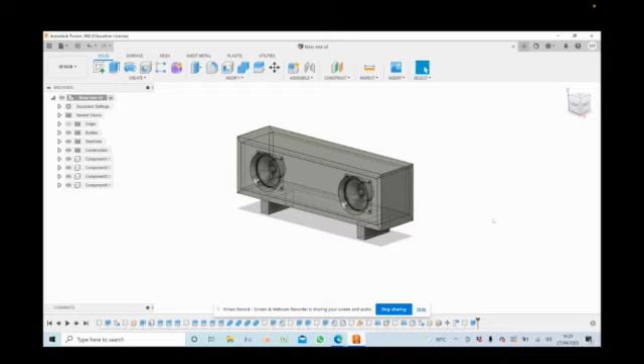Today I'll be showing you how to create a technical drawing using Fusion 360. The model on the screen is of quite a simple Bluetooth speaker, and this is what we're going to be referencing today. So to begin, what I want to do is go over to the left-hand side of the screen where we see the Design tab. We're going to click on that.

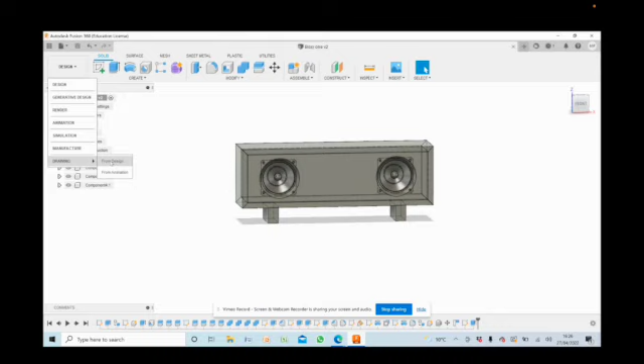And this is where we can take our three-dimensional model and turn it into a 2D orthographic drawing. So we're going to scroll down to Drawing, and it will give us two options when we highlight Drawing. It'll say From Design or From Animation. We want to use From Design. Once we click that, the Create Drawing box will pop up, and it gives us a few options.

We want to create a thing called a GA, or a General Arrangement Drawing today, which is, in essence, a 2D instruction manual of how to build an entire product, or how an entire product goes together. So we want full assembly to be clicked in this drop down here. Drawing, Create New, that's fairly standard, should always be the same. Template from scratch, that's absolutely fine.

ISO standard, perfect. Units, make sure they're in millimeters. If you are running an American machine or similar, they might appear in inches, but we want to use millimeters in the UK. Sheet size A3 is perfect, really good for printing out and putting into your portfolios. So I'm happy with that, so I'm going to go ahead and click OK.

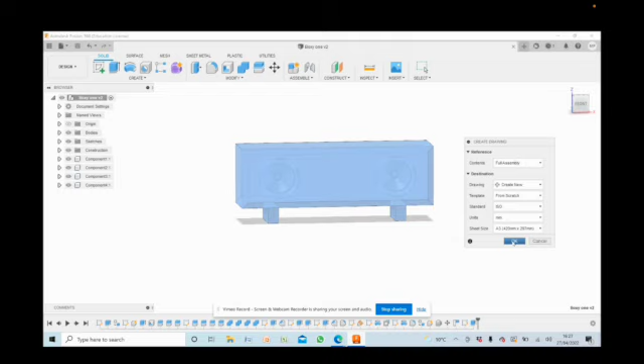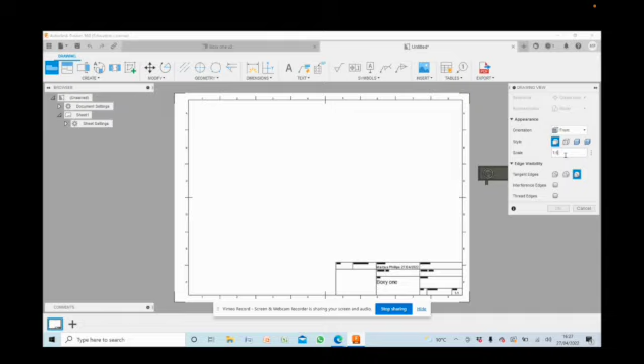Once I've clicked OK, a new tab opens. This is where we can start to draw in 2 dimensions using the original 3-dimensional model as a reference. So I've got the model kind of floating here with my cursor. That will remain until I click down onto the paper. But I want this to be slightly larger, so I'm going to change the scale from 1 to 5 to 1 to 3. This can always be changed at a later date.

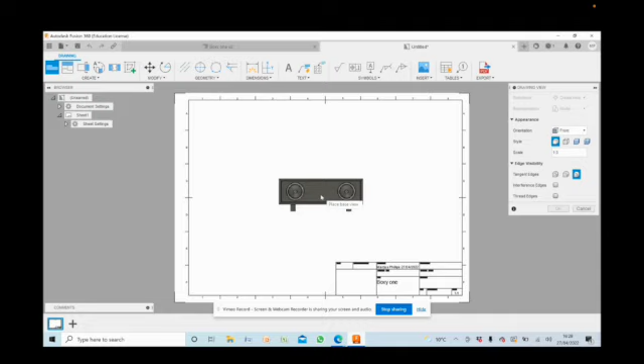I just like to see it quite large on the page as we begin. If I'm finding that the page is getting a bit too busy or confusing, then I will always reduce the size of the drawing. So I'm happy with that at 1 to 3. So now I'm going to click down somewhere in the middle of the page. Everything can be edited after, so it doesn't matter too much where you put your first model.

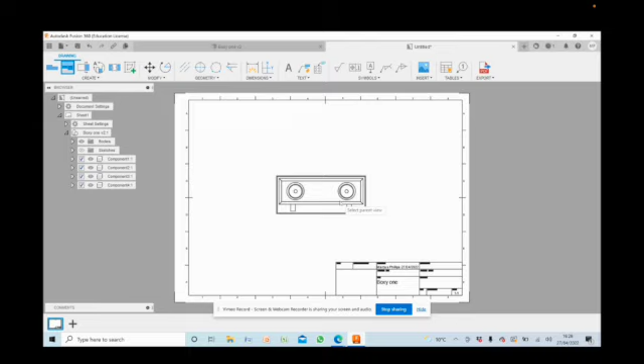So once that's been dropped there, we're going to go back up to the top left and click on Projected View. Projected View is a great tool. What it does is allow you to pull out different views of the 3-dimensional model, similarly to what we do when working with our 2D orthographic drawings. We look from a left view, a right view, bird's eye view, and a worm's eye view. We can do the same using the Projected View tool.

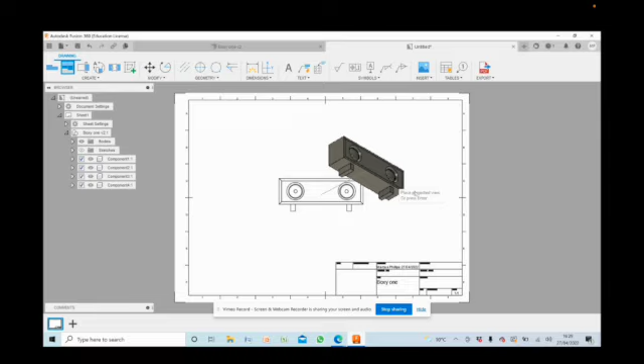So once it's been selected, you select the front-on view, and you will see, as I move my cursor around, that the view will change depending on where I move to on the page. So here, we'd be looking down on the model. Up here, we'd be looking up at the model. We'd be looking at the left-hand side of the model here, and we're looking at the right-hand side of the model there. Because the left and right-hand views of this model are fairly similar, I'm just going to select one, and that will describe how the product looks from both sides.

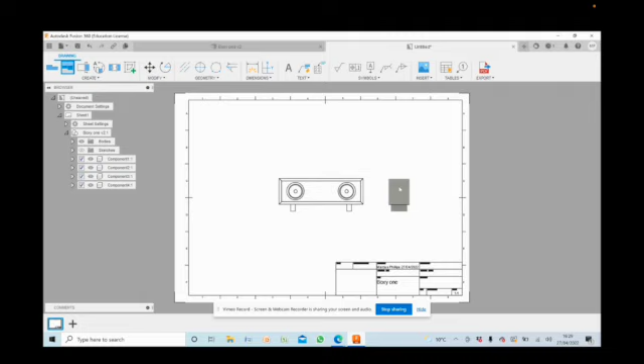So I'll probably go for a left view here, but I'll definitely put in a worm's eye view, and I'll also put in a bird's eye view there. And one thing that's really great is just to put kind of 45-degree side angle in so we can fully describe the product. We'll just stick that over there for the time being.

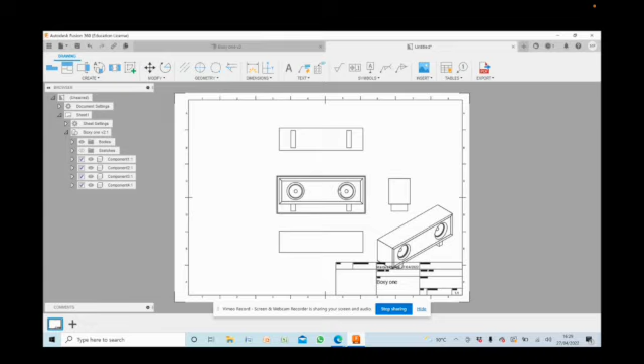Now, in order to move these around the page, you select and drag, and then release once you're happy with where they are, like so. And they will all move in accordance with each other, so they will always stay perfectly in line. Excellent, same over here.

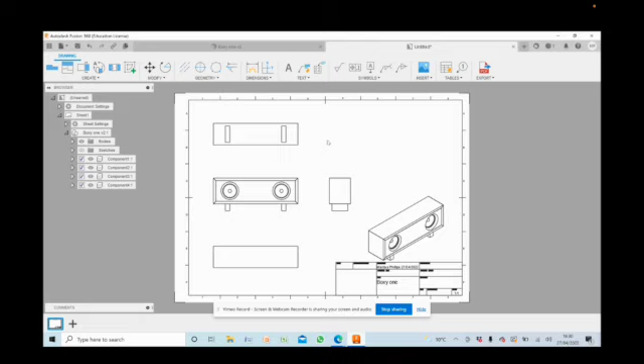There we go. Right, what we want to do now is pull off some dimensions from this product. So what I'm going to do is introduce, in my opinion, the most useful tool in this 2D drawing package. Now that is the dimensioning tool here. You want to select this tool, and what this tool does is it snaps to edges, points, circles or holes in the three-dimensional model, grabs onto them, and it's able to measure between specific lines that you tell it to measure between.

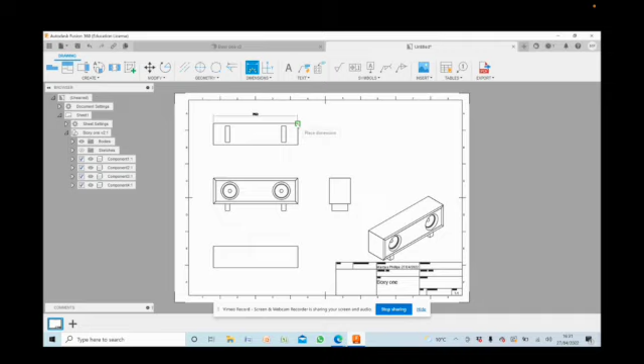So an example of this would be, if I click on the tool there, and I select this corner here, and I select this corner here, and click, you will see, if I zoom in, that has given me a reading of 360 millimeters. Now that's just an example, so I'm going to delete that, and I'm going to show you how to use

this tool effectively. When we're creating 2D technical drawings, what we want to do is always go from one point of reference. And there's reason for this. This is so if you hand this technical package on to someone to manufacture the product, you don't want them to get confused. You want them to be able to go to one point of reference, and using that point of reference, be able to read every measurement that they require to build this model from there.

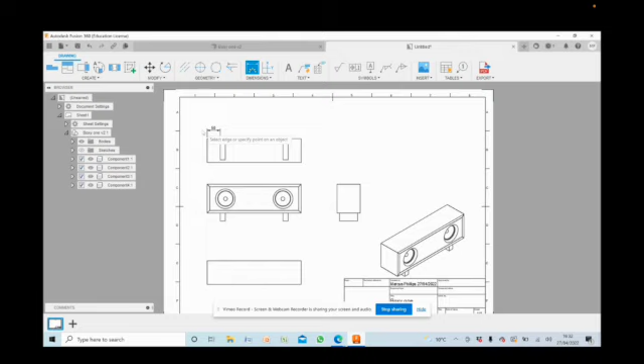So let's use this back line here. And what we're going to do is start by clicking on our datum point or our reference point, and we're going to measure out to the first point that you encounter as you move from left to right along the model. So that would be the underside of the foot of the product. So we're going to click there and drag up. Now that is 50 millimeters away. We can see there. So we know that from the left-hand side of the product to the left-hand side of the product's foot is 50 millimeters. So that's the first point of reference.

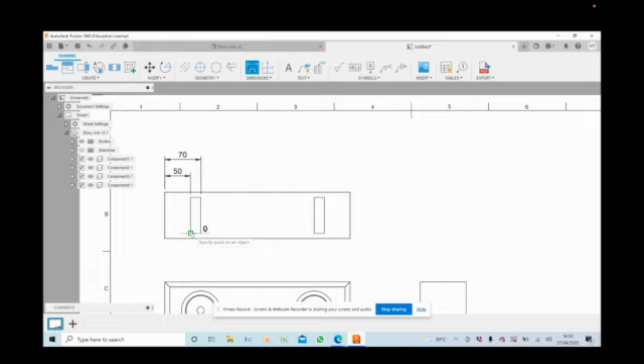We're then going to have another go using that same 0 point there, the datum point, and we're going to go to the right-hand side of the foot, click there, pull up, and click again. And now we know that from one side to the datum point is 50 millimeters, and then from the other side to the datum point is 70 millimeters. And what that tells us is that the width of this foot is 20 millimeters. Now I can check that by clicking like so, and indeed, yes, 20 millimeters.

So next, we go back to our reference point. Always go back to the reference point, and we go to the next point of interest, which would be the other foot. And we pull it out, and we click. And we do again for the other side. And we pull out, and we click. And those two are the same. That sounds about right, or looks about right.

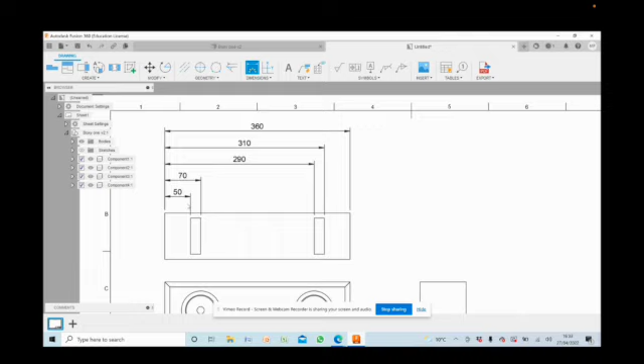Now I just want to know how far it is from the datum point right to the end of the product, which is the final point of reference, and that is 360 mil. So we know that this foot is 50 millimeters away from the left-hand edge. We know that this foot is 290 millimeters away from that datum edge, and we know that the entire product is 360 millimeters in length.

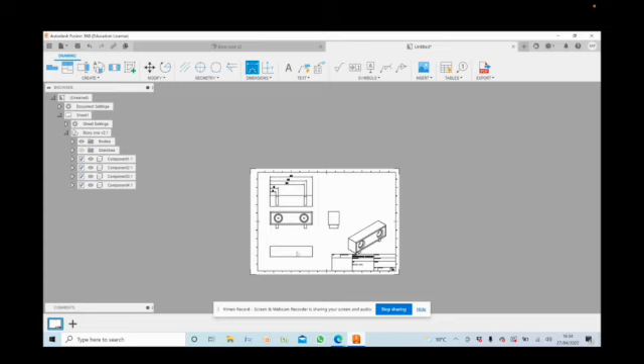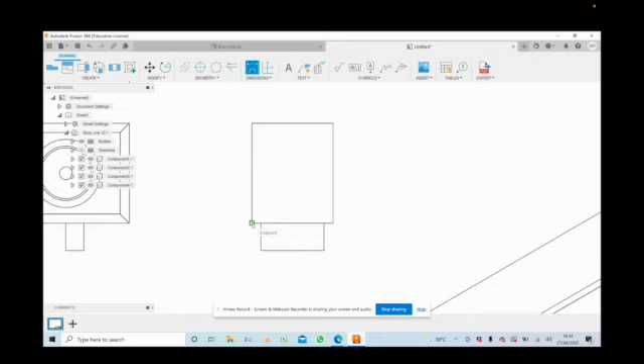So what we're going to do now is do the same thing, but side on. And what that will tell us is we know how far back this foot starts, if you look at it from the side, but we need to know the detail of how far in it goes. So we're going to do something similar by choosing this as the reference point here. And we're going to go out to the first point of interest, which is 10 millimeters.

Probably better to do it from there to there. So that shows 10 millimeters. So we know that from the front to the start of the foot is 10 mil.

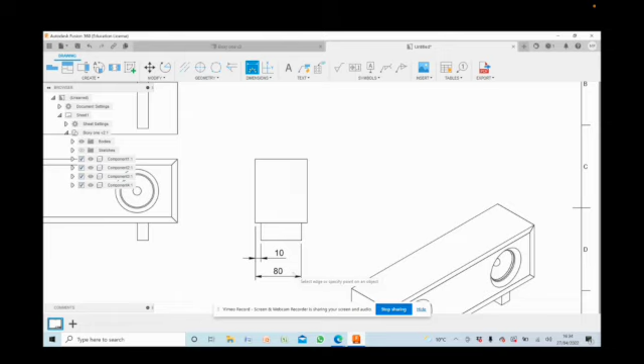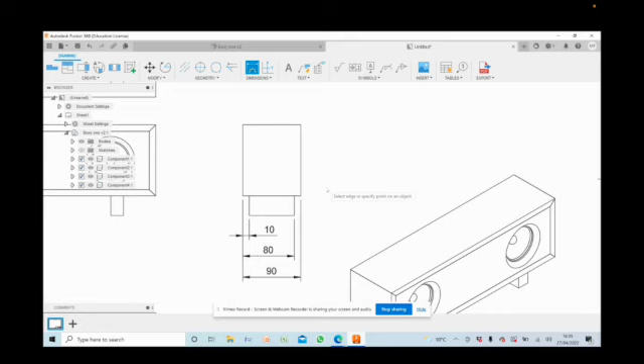And then to the next point of interest is over here. So already, just by taking two measurements from the front as we look at the product, we know that you need to go 10 millimeters in before the foot starts, and then another 70 millimeters, because 80 minus 10 is 70, to the back. And then from there, we can measure the width of the product, which on this occasion is 90 millimeters. So we're starting to build up a three-dimensional picture of the detail of this product through two-dimensional drawings, really understanding the front and side of the product.

Now, what else do we need to know about this product? We need to know things such as the holes where the speaker drivers are inserted into, where are they? And how do we know where to make those holes?

Well, same thing again, we choose a point of reference, usually on the left-hand side of the model. And what we need to work out is that center point. Where are we going to drill the holes? So we're going to click on that point of interest, and drag down. We know that from the left-hand side of the product to the center hole is 70 millimeters. And we're going to do the same for the other hole. We know now that is 290 millimeters.

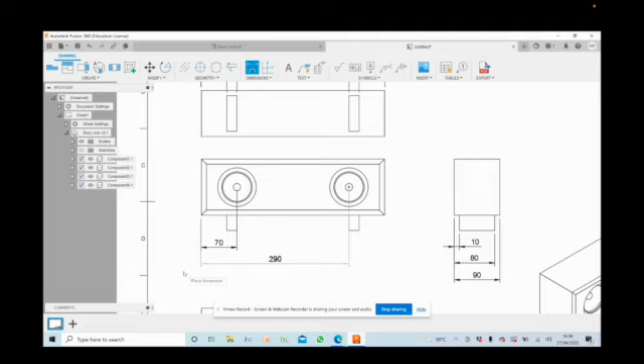Same thing again, we need to know how far up those holes are. So we're going to go from the same point of reference to that hole there, but to the side. So we can see that it's 55 millimeters from this 0 point here to the center point of that hole there. And they are identical, or mirrored rather.

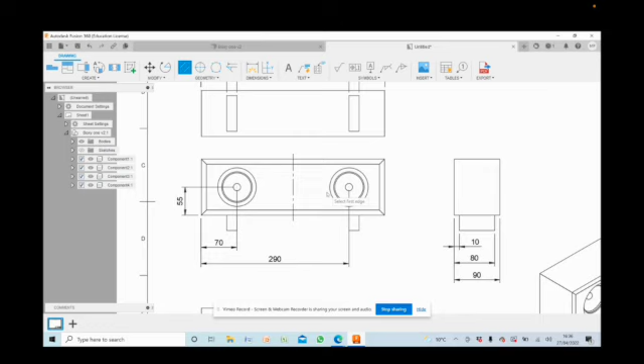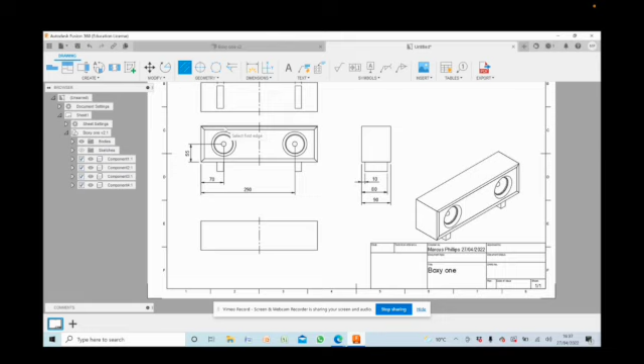So we want to show that by putting in something called a center line, and we select that edge and that edge. And that shows us that this side here is exactly the same as this side here. They're just mirrored. So that's a good habit to get into, using the center line tool up here, just to show where things are equal as you look at them. So actually all of these parts here are mirrors of each other, so we just want to put that center line in.

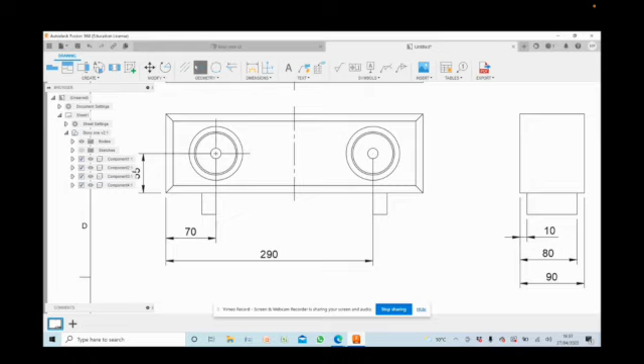Another good thing to do to make it clear for anyone manufacturing these products is show that there's a hole in the face here. We can do that by using center mark. What a center mark does is show that there's a hole there, but it also shows that it's a perfectly circular hole. We use this tool by clicking on it, clicking on center mark, and clicking on the outside of that incision, and that shows a kind of cross that goes through the middle, showing that it's perfectly circular, and that indicates where to drill.

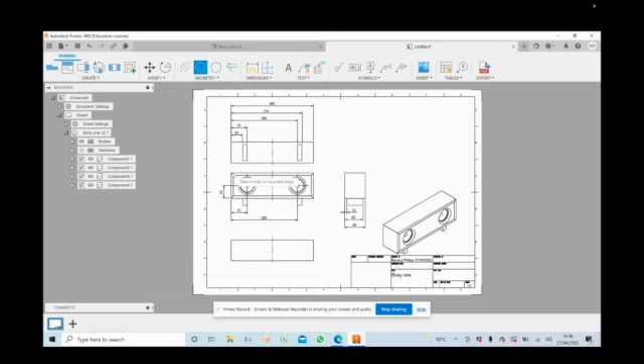So we've already got a lot of information down, but we could have a bit more. We could have more in the sense of the way that this product's assembled. It seems to me that it's made from pine or plywood, something like that, but we need to add more detail. How thick is that ply or pine wood, and how is it joined together?

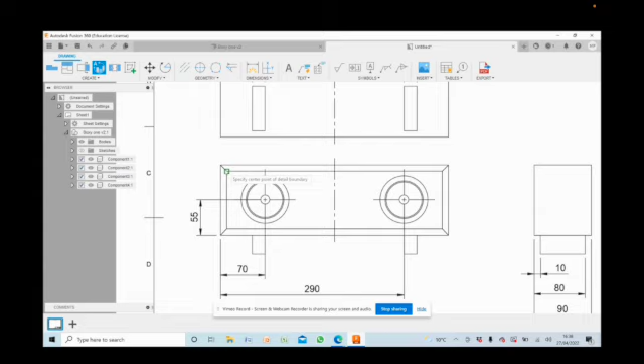So what I want to do is actually zoom in on this part here, which shows the joint, some mitre joint, and I want to show how this is assembled. So I'm going to go to Detail View up here on the left, click on that tool, and select any part of that corner. This is going to be called A. It's kind of like a magnifying glass almost. And I'm going to drop the other part of A there. Probably going to make it 1:1, kind of like a zoom in.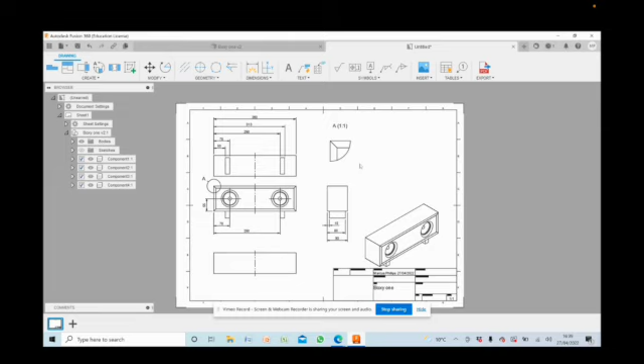So what we've done is circled it, like so. And then a larger image of A has popped up here. What we can do with this larger image is start to detail it. And what I mean by that is add a thickness. So we can say that is 10 millimeters there, and that is 10 millimeters there. And we can also add in an angle using dimensions as well.

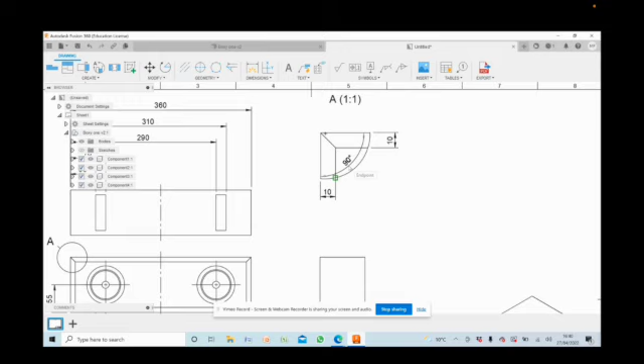That'd be angular dimension. Select that line and select that line, and that shows us that that is 90 degrees. It's probably not necessary on this drawing, as it's perfectly clear that that is 90 degrees. However, if you were using a different angle, something that wasn't quite as clear and obvious, you'd probably want to document that.

So that's a good way of showing a piece of detail, is using the detail view, drawing a bubble and pulling it out. Another thing we can do to add manufacture notes, always useful, is by simply writing in text here.

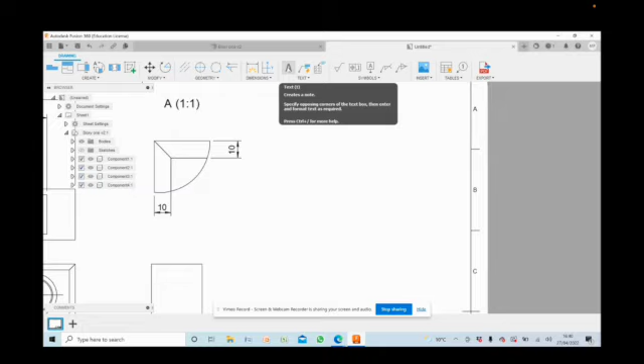So if you click on this icon that has the letter A, this is the text button, and it will allow you to write some manufacture notes. So you can just type in there, pop down.

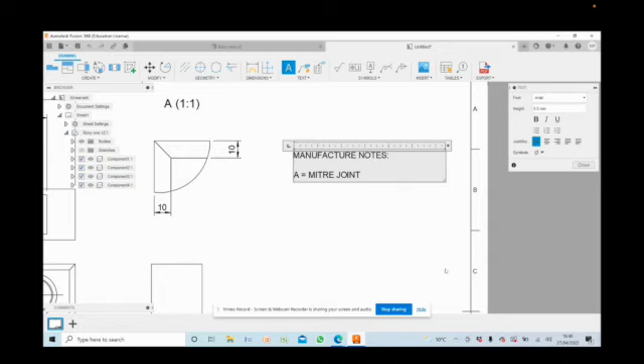I'm going to say A equals miter joint, 10 millimeters pine. I'm going to highlight that all the materials used are pine for the outer casing. Pine's a great material as it's relatively cheap, it's fast growing wood, and it's easy to work with.

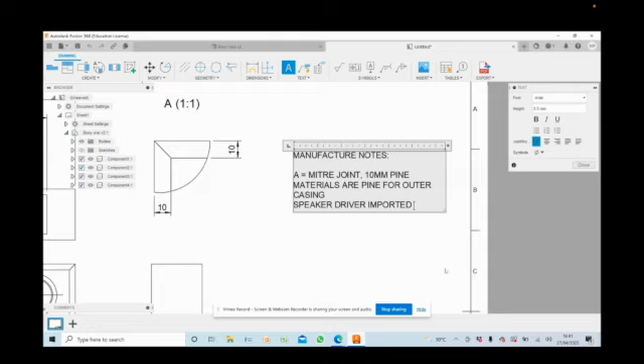I'm also going to highlight that the speaker drivers, so the actual cones or speaker cones, are imported parts. We don't have to worry about the manufacture of them too much, we can just buy them in. There we go. You just add those notes and they will be very helpful for anyone that is going to take this document and use it to manufacture our speaker.

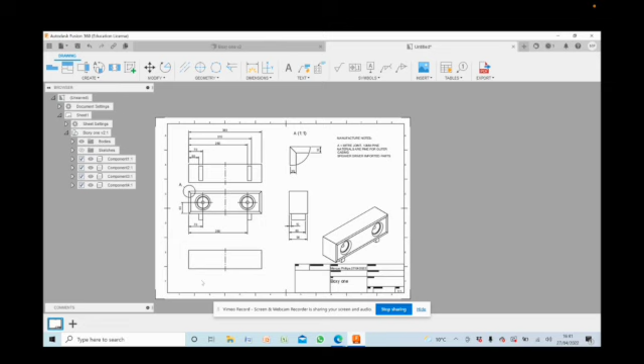Now, it's always good just to have a look over your drawing and observe anything that you've missed, any detail that you might have missed. Now, I've noticed that it's not clear how far this foot comes down, so it'd be great if I could just highlight that.

What I'm going to do is go back to the dimensions tool, click on dimensions, choose another point of reference. In this instance, I will opt for this right point here on the far extreme of the foot, measure up to the first point of interest, just 30 mil up, and then same for the top of the product. So that's 140.

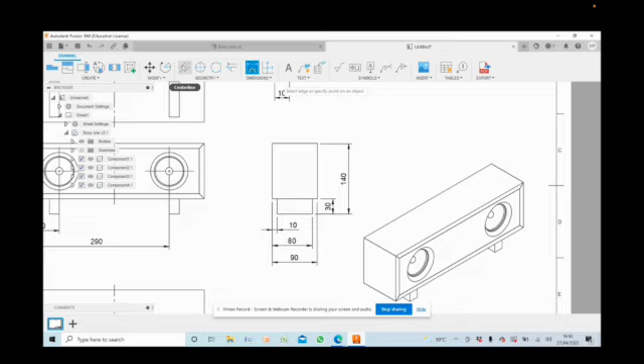I've also noticed that as you look, this side view is a mirror, so I'm going to put a center line in because they mirror each other. There shouldn't be any difference between the left-hand side and the right-hand side.

It's also got me to thinking, perhaps I should put in another note to explain how the foot is joined to the main body of the product. I would say, judging by the simplicity of the design and the fact that it's a product that is designed to be manufactured quite quickly and quite affordably, that it's most likely that this foot is joined using a butt joint and wood glue.

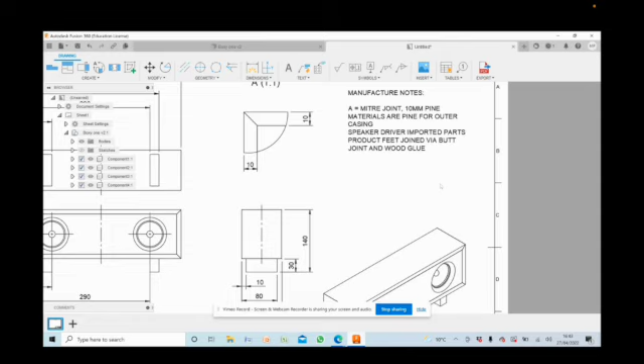So I'm going to put in: product foot or product feet joined via butt joint and wood glue. Simple. Stating the obvious and giving information about how this product is manufactured.

The last thing we want to do is come down to this table here, where we can add in detail. One thing that's very important to do is add in the scale. If you remember from the beginning, this is a scale of 1 to 3. Millimeters are assumed, especially in the UK and Europe.

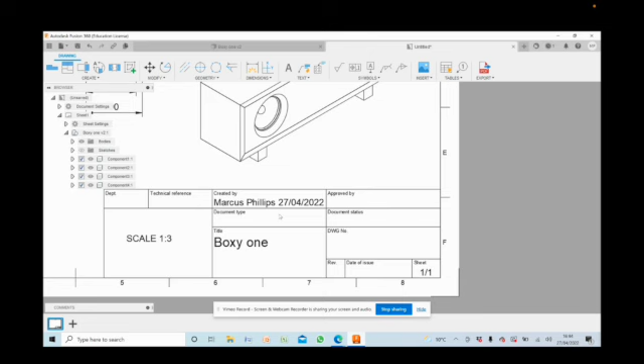There's my name. There's the date that I completed the drawing. Probably don't want the title boxy one. We'll call it Pine Speaker. Drawing number 1.

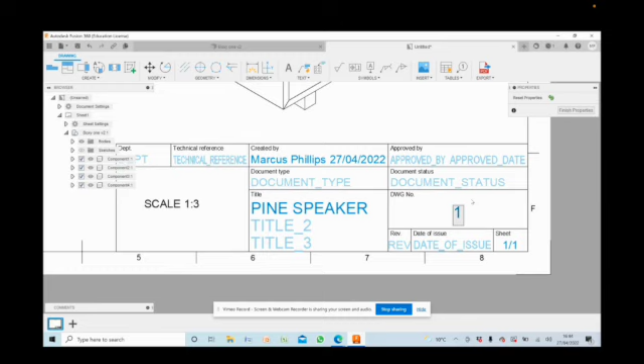Then we can leave the rest of that to be completed by hand later once the drawing has been double checked by a technician, another teacher, or someone else in the workshop before we get manufacturing this product.

So, another look over the product. It's always good to check. As I look at it, I feel confident going forward with making this into a PDF and printing it, and it feels to me like a document that I could take to someone, give to them, and they would then understand the dimensions of the product that I'm trying to describe.

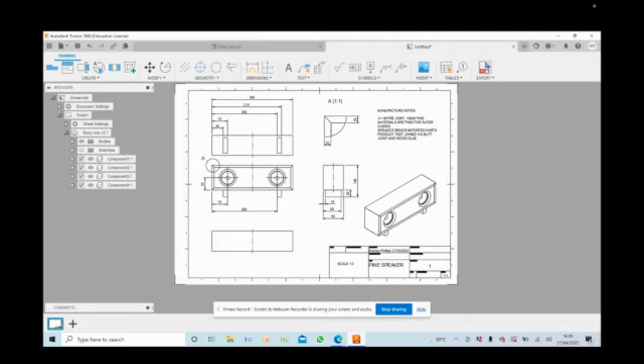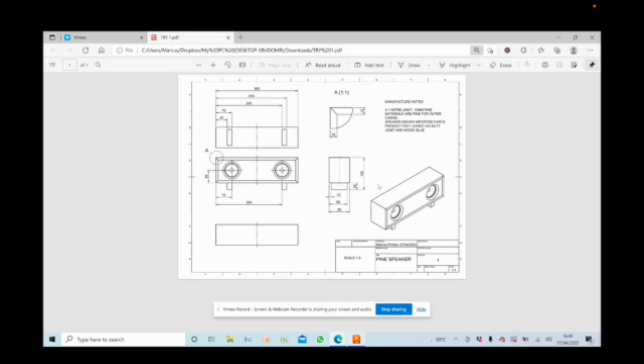So what I'm going to do finally is export this document by clicking the PDF icon up on the top right hand side of the page. I'm going to open the PDF, click OK. Here we go. Document automatically opens for me, and I can then review it one last time before clicking print.